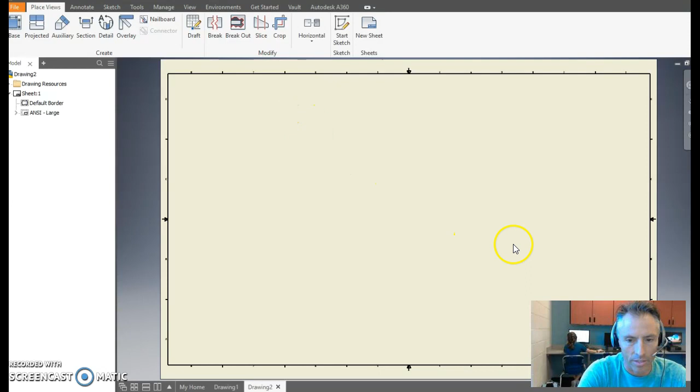You can't really see it because of my video, but it's a size D, which is a ginormous piece of paper. If you don't change that, your text is going to be really small. You won't even be able to see it, because only if you were to actually print it full size would you see it. So the first thing we have to do is go over to Sheet 1. We're going to right click and say Edit Sheet. And we're going to change it.

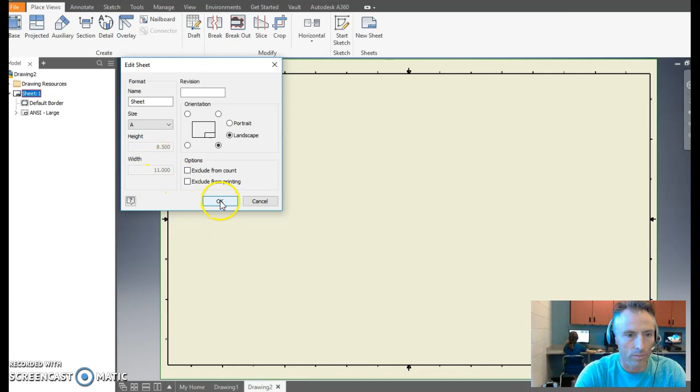You see it was a 22 by 34 inch piece of paper. We're going to change it to a size A, which is a standard sheet of paper, which is 8.5 by 11. So hit OK. And now this is a title block. Title blocks are super important. We can put a lot of good information there. But right now, we would actually rather have some more space. So I'm going to click on ANSI Large and just say Delete. And then that leaves the border.

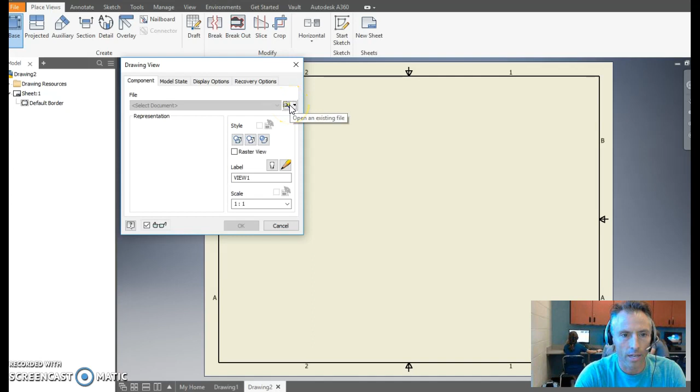And we're going to go up to Base View, and we're going to bring in our first part now. So if you click the little file with a magnifying glass in it, I'm going to go to my desktop because I know I've got a part on there that Matthew designed. There, Matthew, and we're going to open that up, and it's going to bring it in. And you get to choose what is the front view. You can make it whichever view you want. Now mine happens to say that the front view is this, and that's fine. I'm going to go ahead and go with that.

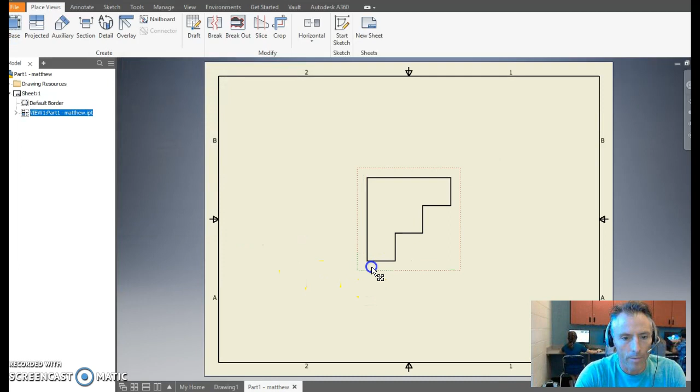So I'm going to hit OK, and I'm going to bring this guy down here and put it in the bottom left corner. This is the front view, and that's what we always start with. Then you're going to go to Project, and we're going to project up to a top view, over to a right side view, and up to an isometric view. Now you don't really see the previews yet, but you will. We're going to right click and say Create. And at this point we now have our 3 view and our isometric.

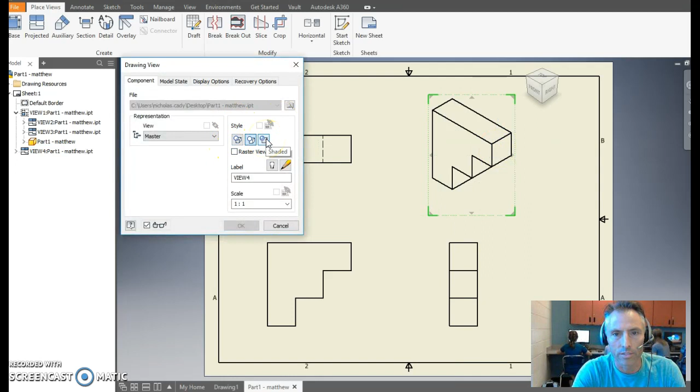Now we want the isometric to be shaded because that's the drawing that most people look at first. So we'll right click on it and say Edit View. And we're going to click this little box right here that says Shaded. And it's going to go ahead and give it color when we hit OK. Now it looks nice. Now we put our dimensions on these 3 views. We never dimension the isometric.

So I'm going to go up to Annotate and hit Dimension. And then we want to give it all the important dimensions without being redundant. And this is something you guys will get better at throughout the year and over your high school career. But obviously we need an overall width. And it brings in the dimension for you. All you have to do is click on the line and drag out, and it will bring in the dimension. So we have an overall width, we have an overall height.

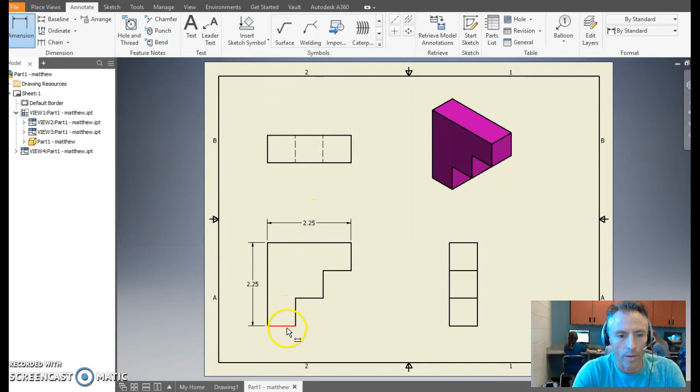Now we also have these little stair steps. So we should say what they are. And we don't have to say all 3 of them, because if we know the overall is 2.25 and we know this is 0.75, this is 0.75, this must be 0.75. So you could put it in or not. And I'm going to do the same thing for the height. I'm going to say that's 0.75, and that's 0.75.

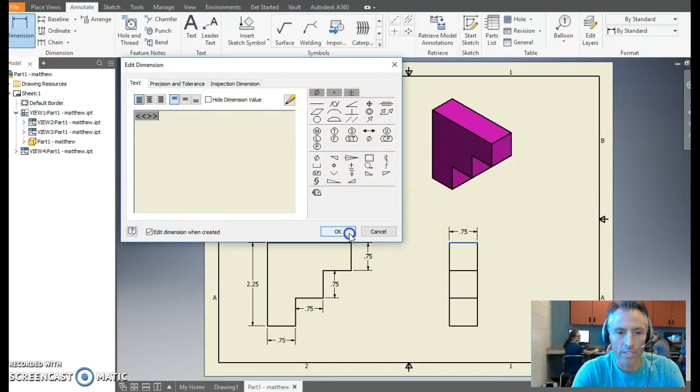Now the only thing we're missing at this point is the depth. We can show the depth here on the right side view, or we could show the depth here on the top view. They're exactly the same dimension, just 2 different views. You shouldn't show both, so I'm going to just right click and say OK, and I'm going to go ahead and delete that one. This is what your drawing file should look like. It should be the front, the top, the right side views, with the shaded isometric and all the dimensions you would need. Again, you don't have to be perfect, just be in the ballpark.

Once you're done with this, take a screenshot of this part and put it onto the Google Doc that you linked to my site, and then do a drawing file for each of your different pieces. Once you have all your drawing files done, call me over and you get your grade check.